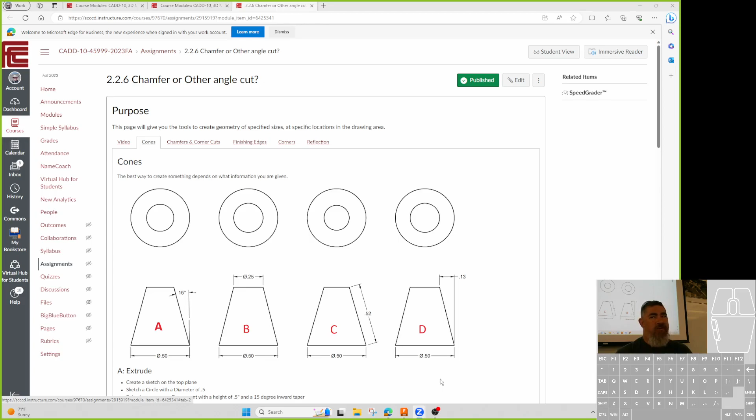So I could do an extrude and then a chamfer command right there, right? Or I can do what? The same revolve. The same profile right here. Okay. I can just change it from dimensioning the top to dimensioning the edge to dimensioning that, right? And have that same revolve. What would make me choose rather to do this as a revolve versus extruding it straight and doing a chamfer? And I know I haven't shown you guys chamfer yet, but we'll get to it in just a minute.

Well, I'm still not seeing how you would revolve that because I don't think there's enough dimensions given. Like that. The diameter, I already said everything's a 1/2 inch, and then I can just give in this 1/8 inch dimension there. So we can do it either way.

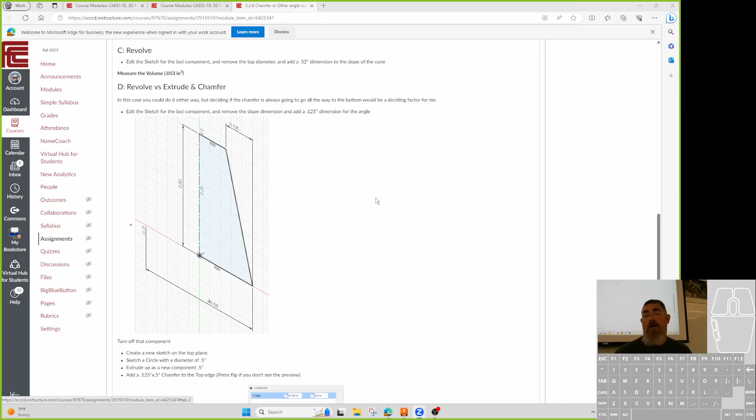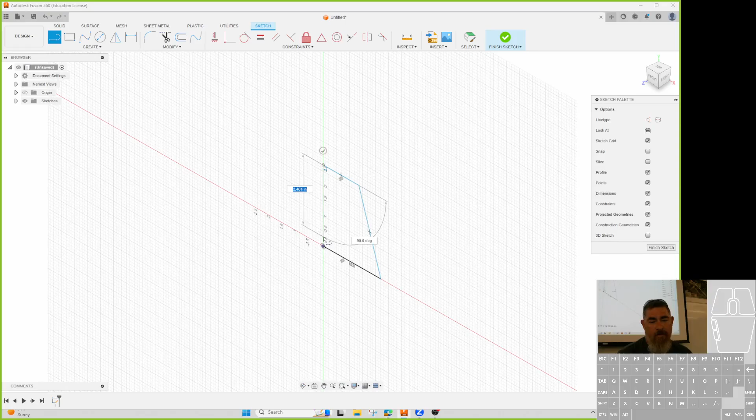Kind of what I would choose is if I was going to make it, so let's come over here. I sketch here, and I draw a line from there to there to there to there to there. If I want to be able to dimension from here all the way across the diameter of this, and not just, because this line is just the radius, right? If I want to do it with the diameter, what do I have to do? Make the center line. Yeah, so I have to turn this one into the center line.

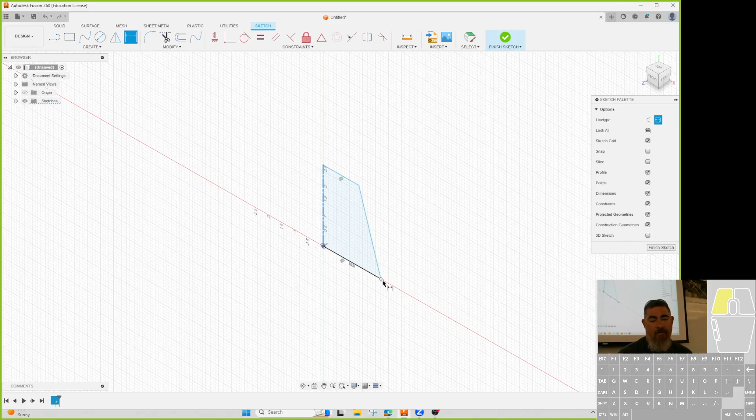Now I can dimension from that line to here, to the point, and put in my dimension. Oops. I think that's 0.5. And look, it fixed itself. Ta-da. Don't worry. Things go crazy like that as you're starting to add dimensions, you can fix it. You can also, in your profile, go to preferences.

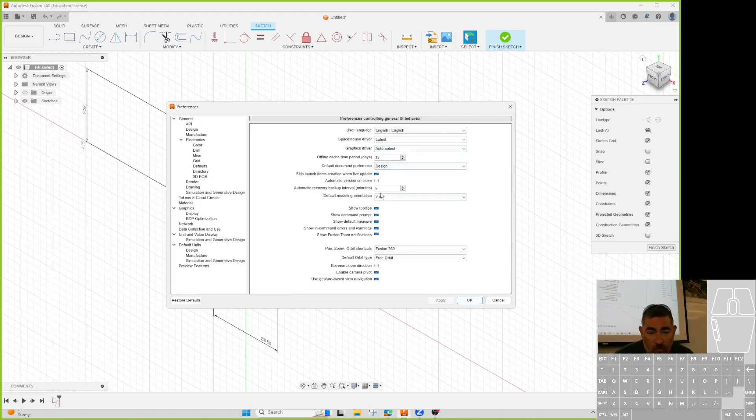One of them here in design, I think, is scale entire sketch at first dimension. Ooh. So that means that when you add your first dimension, no matter how out of scale you are, it's going to scale everything down proportionally to that first dimension. So that might be one you might want to turn on.

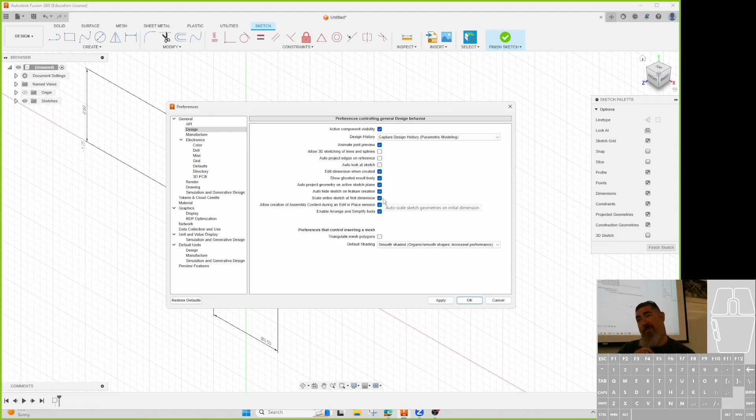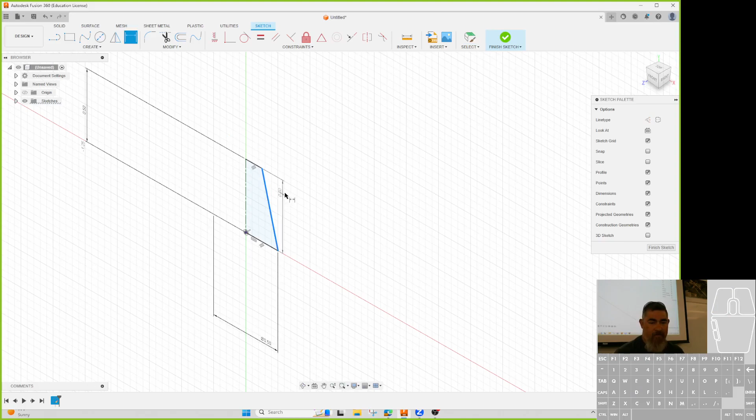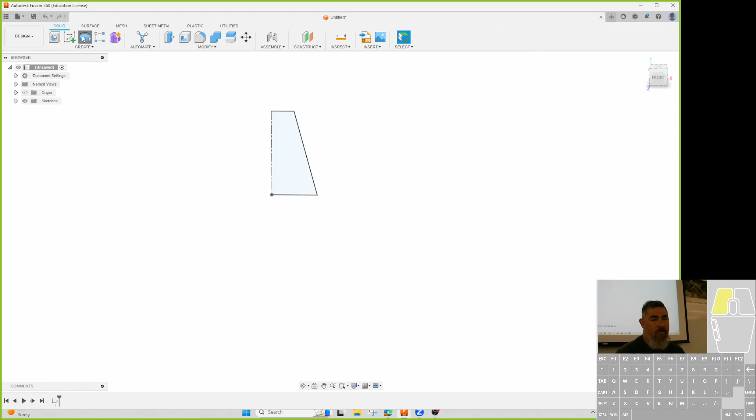So I have that, but this point here can still move in and out, right? So in that first example, I dimensioned there. The second example, instead, I dimensioned here. So remember, if you have your mouse here, you're gonna get the vertical. If you have it way up here, you're gonna get the horizontal, and put it up here, you're gonna get the angular. Okay, so second dimension I dimensioned here, third one I dimensioned here. And I can just revolve that. And since that's the center one, it's automatically gonna go.

So what's the difference between doing that and then doing a circle here? Why is my thing blue? Why? I told it how big to be. It's not centered. It's not linked to the origin. It can move around, so just to make it locked down, I'm just gonna tell it to be horizontal between those points, and I'm putting a dimension.

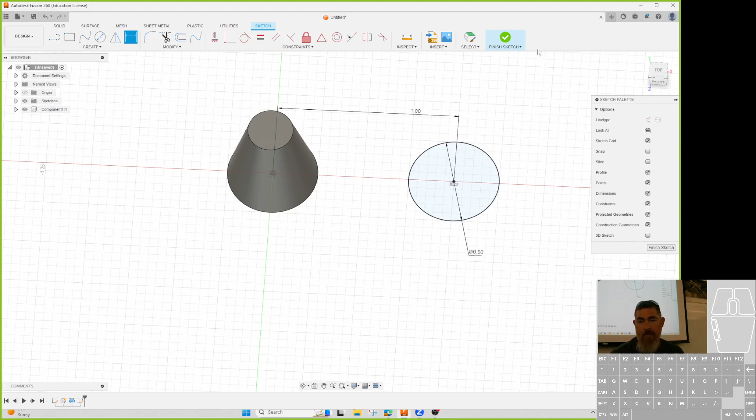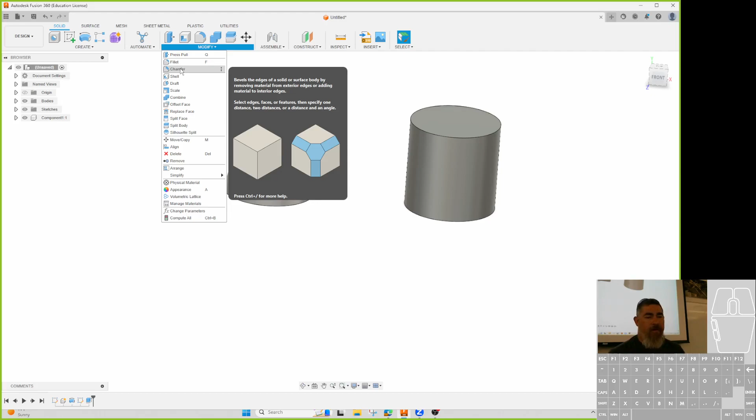So I have this one here. So chamfer is one we haven't used before, or I think I might have done it real quick. But it's just like fillet, but instead of doing a rounded corner, it does an angular corner. So chamfer is used a lot. Remember we talked about a deburring thing, so they're not a sharp edge. Chamfers are done a lot for that. But they're also done for bigger things. So if I just did this and I pick the edge, I can totally be really small and just put a little tiny chamfer on it.

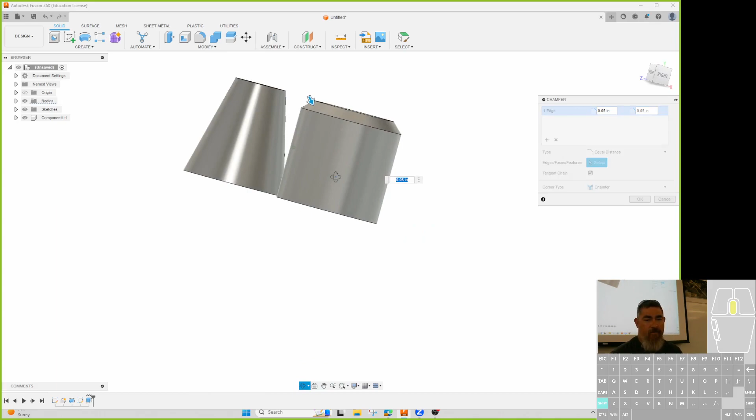You can see as I drag this down, it grows, and you can see it's saying equal distance. So what angle is that chamfer? What angle is that cutting? Like 45. 45. So that's the same distance each way, right? So that's the default option. So if you're doing a break for an edge or something like that, that's usually the option you keep. But we also have other options here. We have two distances, so we can have two different dimensions.

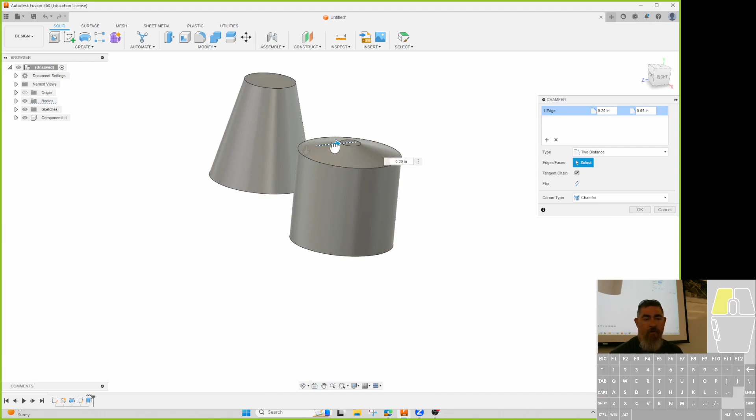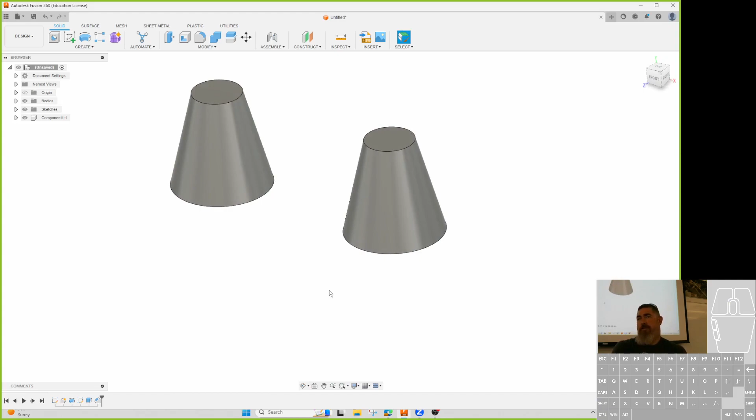So I can do that one, and now I can have one dimension go this way and another dimension go this way. Ooh, that's interesting. So I could tell it to go .25 into the side, and my full ½ inch down there, right? So I can get the same thing that I had on this one. What's the difference? Because they look the same now, right? What's the difference? The chamfer's longer.

So what happens if I want to change it to be, say, 5/8 high, and I still want it to stay the whole height? Which one of these is better? So, revolve. The first one might be right, because now I can just go here, change the sketch, change that height, and it stays connected and everything. What if I really want the chamfer of ½ inch to stay the same no matter how tall it gets?

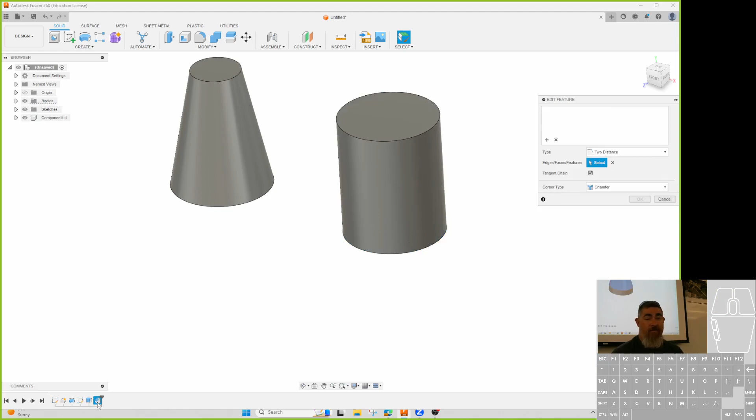Then maybe this one is better, right? But I could also be a little bit more intelligent about it, because when I go here, remember that's D8? Remember I can use my equation, so I can tell it that I want this height to be D8. Oh. And it stays. So now, if I change this height, it's always going to be the same. So now which is better? The chamfer. The chamfer, because now I can make other changes. I can make it go the whole height or less height without having to change the sketch.

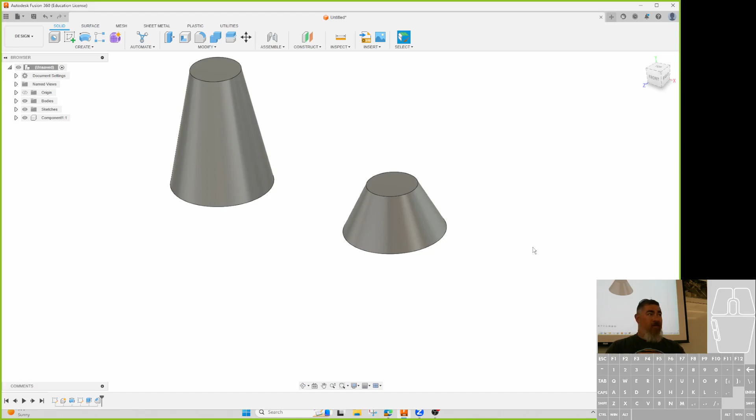Changing a sketch is hard, because now I have to break the sketch, I have to undo. If I want to make this piece that high and have the chamfer only go part way, boom, easy. Easy change. If I want to do the same thing to this one, now I have to go in here, have to undo that constraint there, and now I have to draw a new line in here.

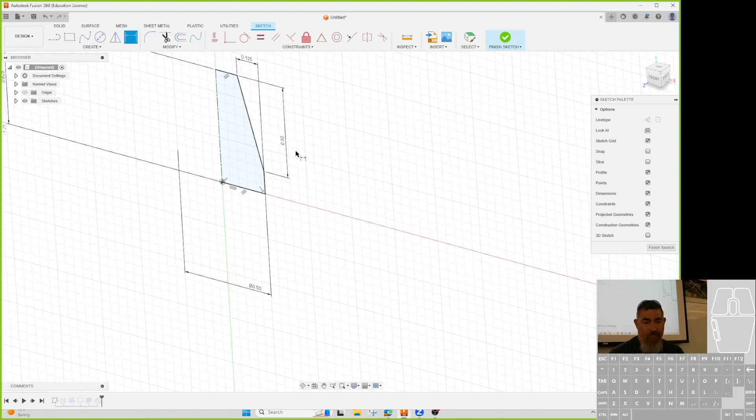And it's harder to edit that sketch than it is just to edit the chamfer, right? So that's another reason why I like having smaller things, smaller chunks. And if I can do it as the feature, I prefer the feature. But if we know it's never going to change like that, then sure, might as well do it in the sketch. But if I can do it separate, I want to do it separate.

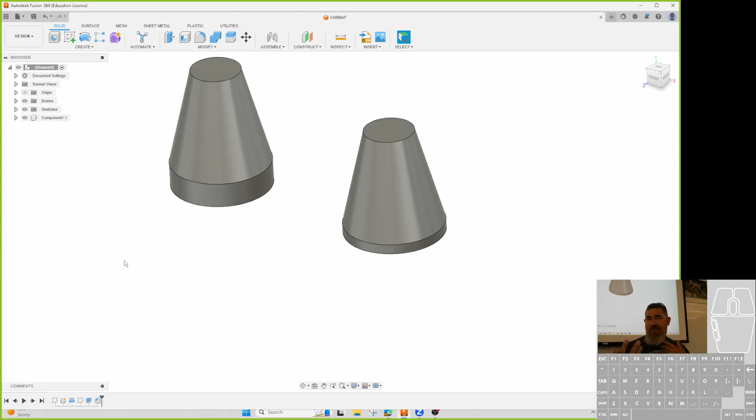It's easier. Also, it's easier to draw a circle and extrude it and then do a chamfer than it is to draw 4 lines, right? At least in my head. So that's something to try out. And so that's why we have this exercise here.

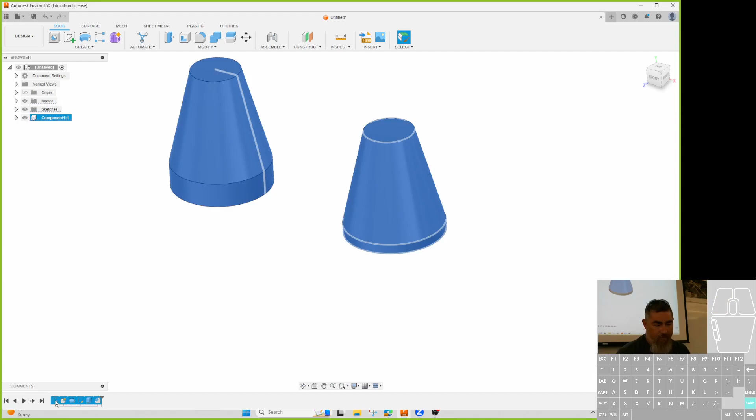if I create a sketch here, you can see it's scaled both of them that time. Mm-hmm. So I accidentally dragged this down and I forgot how to. So if you do it, you can say pin to toolbar and it'll come back to the top, and then you can drag it back around wherever you want it.

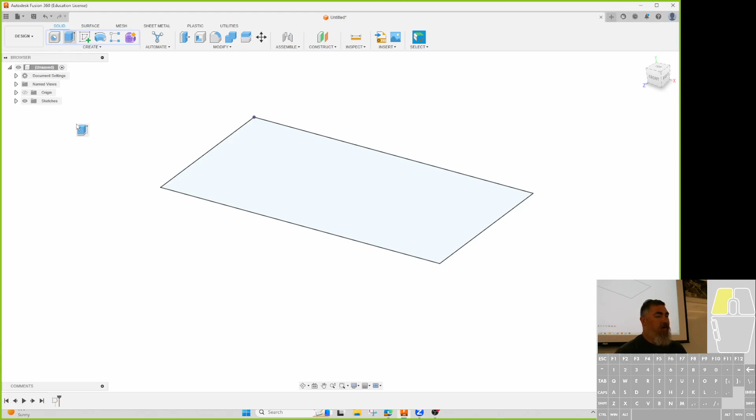So I accidentally grabbed it and dragged it down here, and that makes it go away. So you can see now it's gone. So to get it back, you have to go up, click on the little 3 buttons here to say pin toolbar, and now you can grab it and drag it back where you want it. So there, now I've got my piece. So if I pick chamfer here,

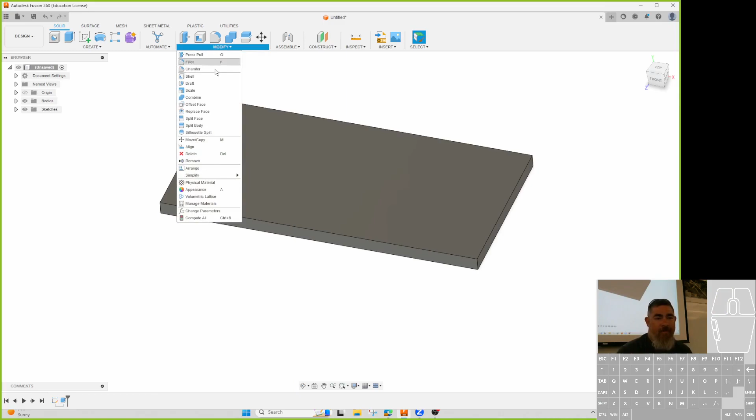you can see, again, I have my 2 different edges, and if you hit flip, it flips which direction those cuts are going. Okay? Sometimes we have to hit flip. We also have distance and angle. So it's going to measure the distance from where the corner was in one direction, and then the angle from that surface. You can see here, I'm going backwards an inch right there, in that direction. And this one is measuring from that same line how many degrees.

Okay? So if the dimension gave you the angle on this side and that dimension, then you have to flip it in your head. So if it's 30 degrees between here and where this line was, what's the angle between this line and that line? 60. Yeah, because it's a 90 degree corner, so you just subtract it. So if they told you 60 and that distance, then you just have to subtract it. I'm not sure if I did that.

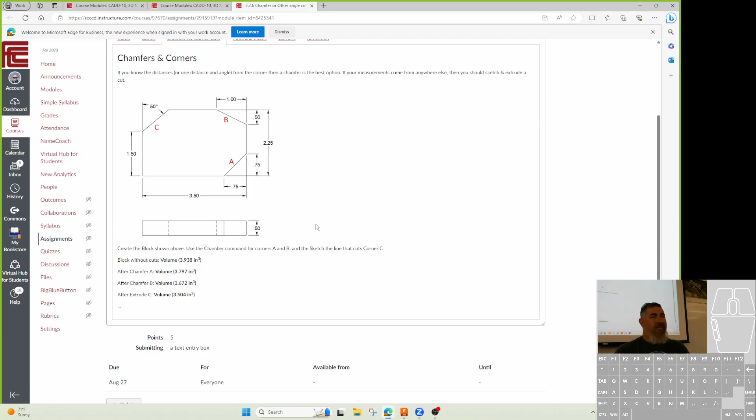Complementary angles. So I didn't do that on these two, but over here, I did that. But do I give you the distance from the corner? No. So can we use the chamfer command? No. Well, if you do the math, then you can use chamfer, right? Yeah. And so, do I like to do math? No. You can tell it to do the math. Just tell it to subtract the two.

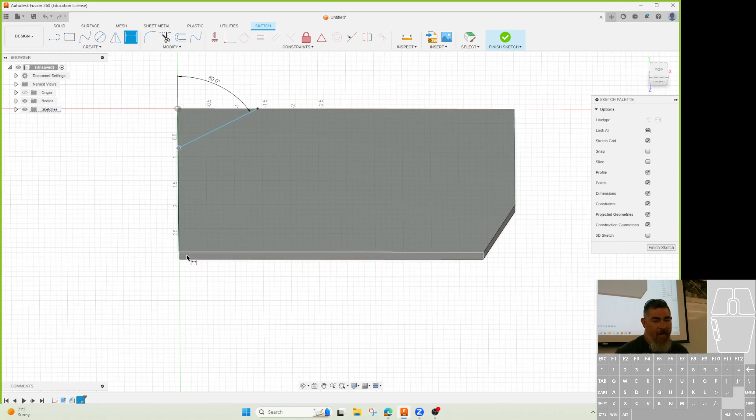So I could look up that equation stuff, but I could also just sketch a line real quick. So I could just sketch a line from here to here and then dimension it real quick. That's going to be my angle. And from that point to that point. Oh, that's better. Whatever it is. So in this case, I'd rather just sketch it than do the math,

but either way, you could do the math, and especially if you knew what that was going to be, you could set up ahead of time. And that's going to be the focus of next week, doing some pre-setup stuff to make it easier. But for this, I'd probably just put in this dimension here to tie that in. And this isn't just for this line, but other things where if you have to dimension to something else, sometimes it's easier just to create the sketch on that.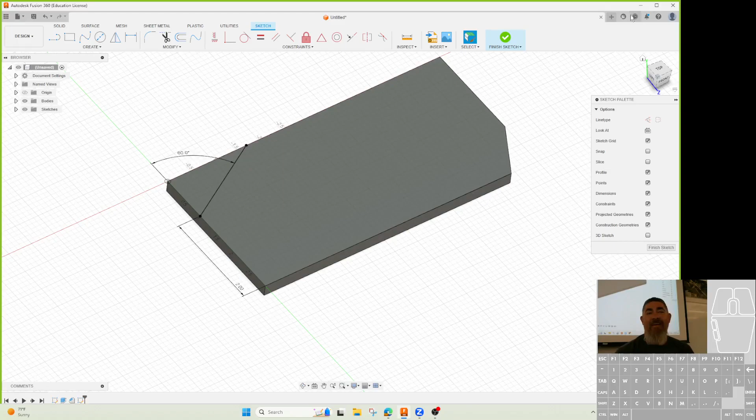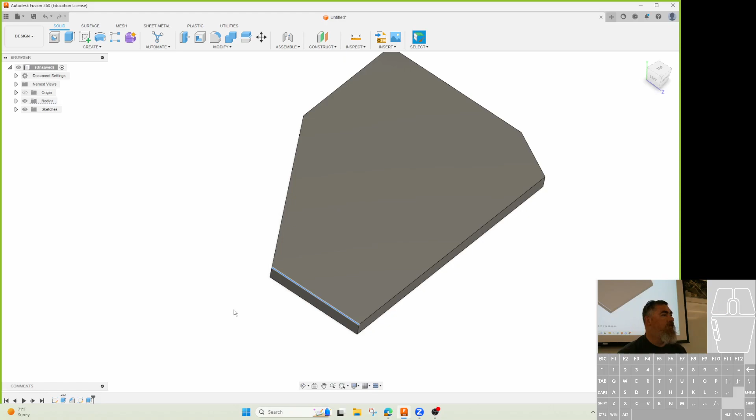And these one-line sketches are my favorite. I do them way more than you think I do. I can say all the way through and cut that off. There. So now that's always going to be there, no matter how wide I make that part. It's always going to have that same 2-inch dimension there, right? So that's kind of where that comes from. Any questions on that?

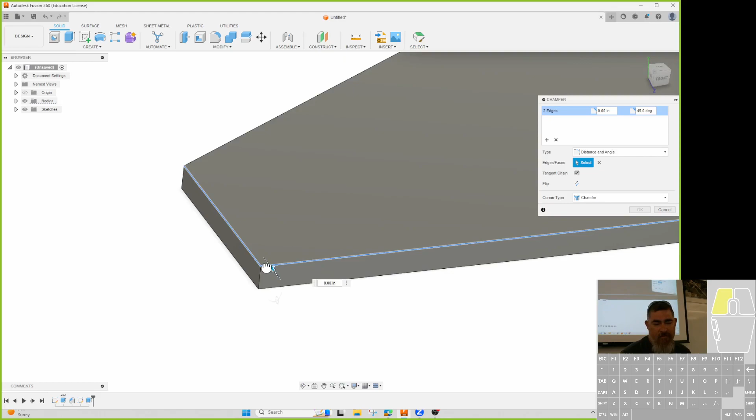No. This next one was just finishing the edge, so just picking the face, and then doing fillets on it also. And then this last one talks about the corners, because when we do three-way corners, if I pick 2 edges, changing this does nothing. But if I had 3 edges selected, I can either get that look, or that look.

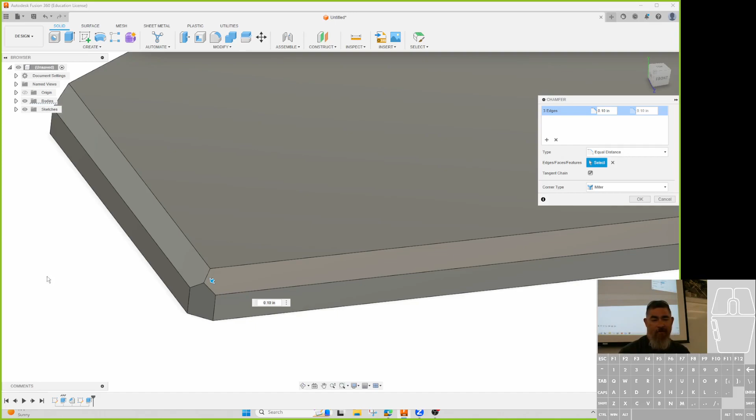This look is easiest to make. That one, this one right here. Because now they can just run the chamfer mill this way, and that way. Or they can profile this one and chamfer it that way. You want this one, they have to roll it around the corner, so just cut off, but it's still kind of okay. This one, I think the machinist is going to want to take you out back and introduce you to the side end of a stick.

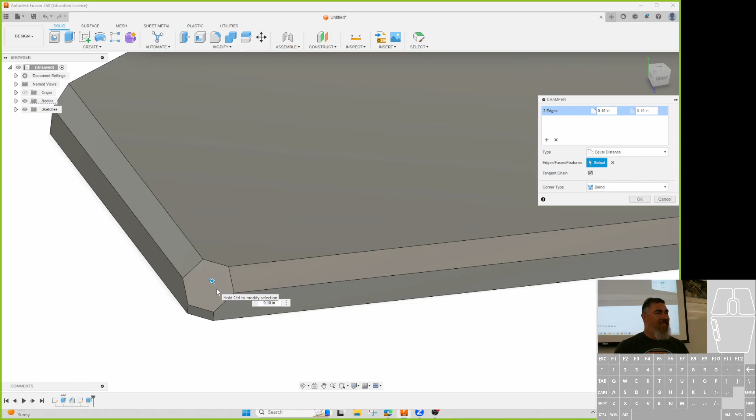Because trying to do a 45-degree cut across each of those corners is going to be a pain in the butt. They'd have to grind it, yeah? Yeah, they might have to grind it, but trying to program that in on the CNC, they're going to be like, what are you doing? So part of it is when we design stuff, we want to make it easy to be made. Pick this off, and yeah, it looks cooler, but it's a lot harder to make. Yeah, but if you're working with a 1/4-inch plate, good luck. Mm-hmm.

So that's kind of what the rest of the exercises are on here, just kind of picking the whole face to chamfer all the edges at once, doing the corners and the reflections. So that's this thing, okay? So we're gonna kind of stop at this point. Any questions on this? Yep.

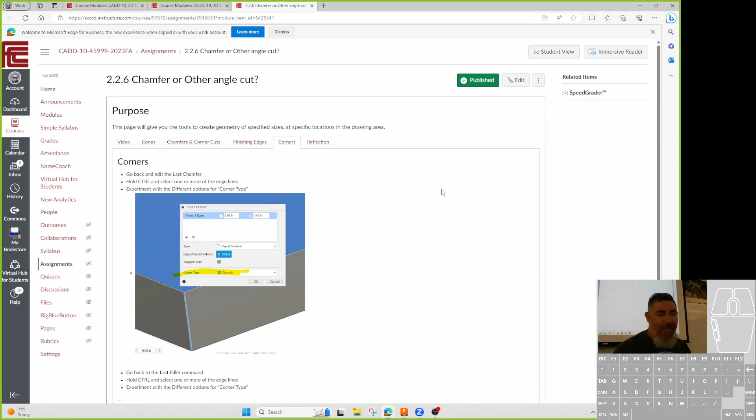You mentioned at the beginning, and I apologize, I missed it, the order of features. You talked about extrude, revolve, loft. Yep. We listed it somewhere. I do not have it listed on here. Can you recite that, please? Features: extrude, revolve, sweep, loft. Yeah, I'm still working on trying to make my flow chart look nice. It's still mostly words. And then we're gonna actually use that later on today.

So right now, work on this one that's 2.2.6, as well as if you still need to do your stuff on loft. Later on, oops, that's not supposed to be 23. So I'm gonna let you work on this for like an hour, so like until 9:30 or so.